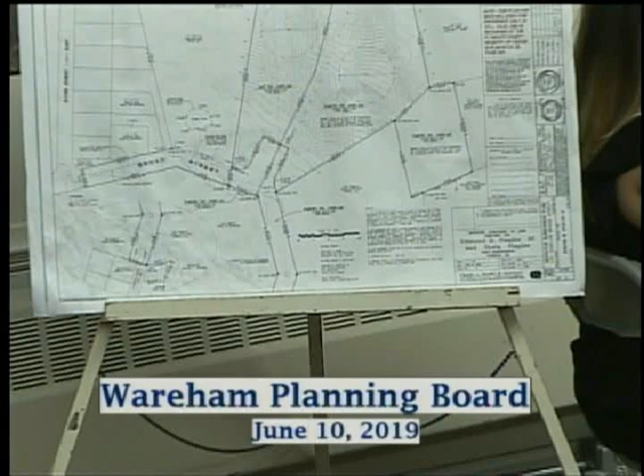The last time we met, there were 4 comments you wanted us to address, and GAF has addressed those and provided updated plans and a cover letter. The first comment was about the reference sheet, the existing subdivision, which was requested to remove Mr. Rowley's name, which they did. Then there was a question about easements, and they've clarified that all of the deeded properties have appropriate easement references within them.

Then there was a suggestion about moving the road as far away from the vernal pool as possible, and they've updated the plans with some annotation. Basically, our intention is to keep the road as far away from the vernal pool as possible. There'll be a trench for the sanitary and electric between the property line and the road. Our intention is to minimize that as much as possible, but keep the machinery and soil within the right-of-way. We'll field-layout that as best we can and keep it as far away from the vernal pool as possible. So that was the third comment.

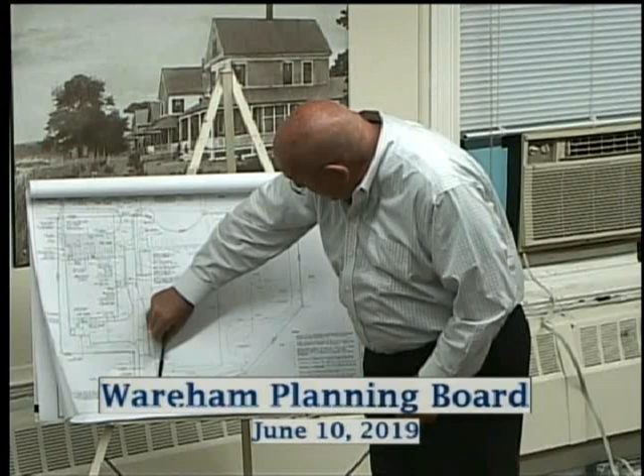I consulted with Factory 5 Racing, and when the abutting landowner acquired this parcel, apparently he stockpiled quite a bit of material there in the form of rocks and boulders, things of that nature. In discussions with Factory 5 staff, the elevation on this site was essentially the same elevation we have at the rear of Factory 5, at the rear of 1004D, and these piles are just rock, they are rock piles.

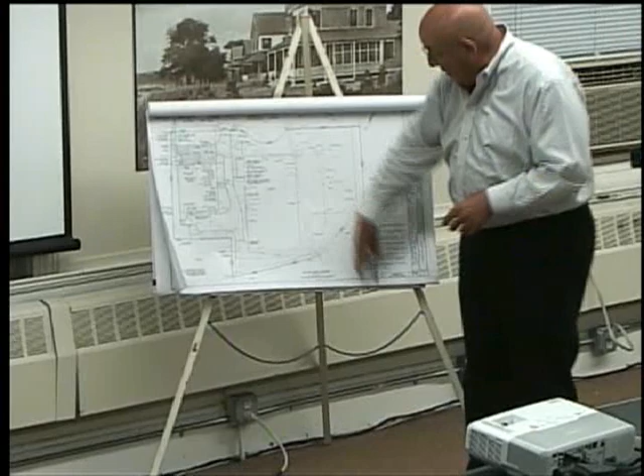The comment was made that we didn't have a lot of information on that, because we didn't dig through them. We did our test pits in various locations across the site. We've done work on this site, and back in the industrial park. It looks to me that the base grade at the rear of the site is around 51 or 52, thereabouts.

We think all those stones are piled on top of it. If you would be so inclined to approve the project and condition it, perhaps a condition could just be put on the project that we assess the ground surface on which those stockpiles had been placed for consistency with what we have throughout the site. But that's the information I was given relative to what took place there.

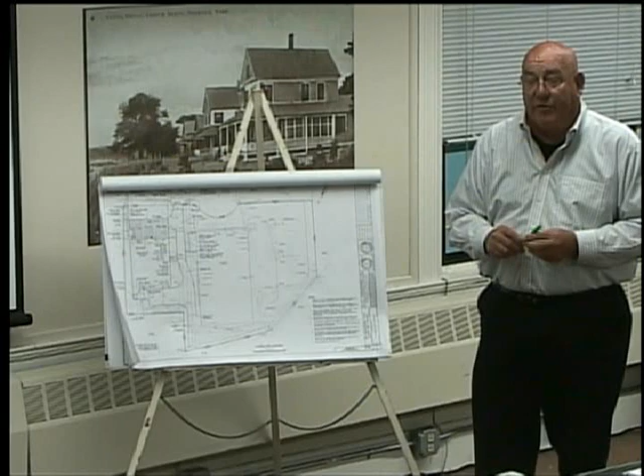Those piles essentially appeared overnight. It literally appeared overnight. So no one really knows too much about it other than one day they were there, one day they weren't there, the next day they were. If the person who put them there was so inclined to remove them overnight, I suppose so.

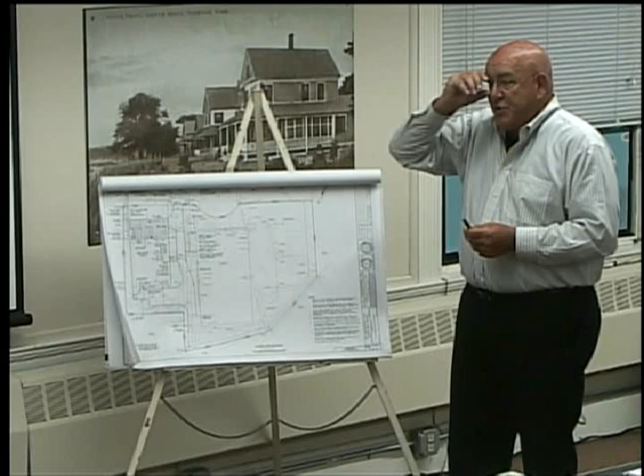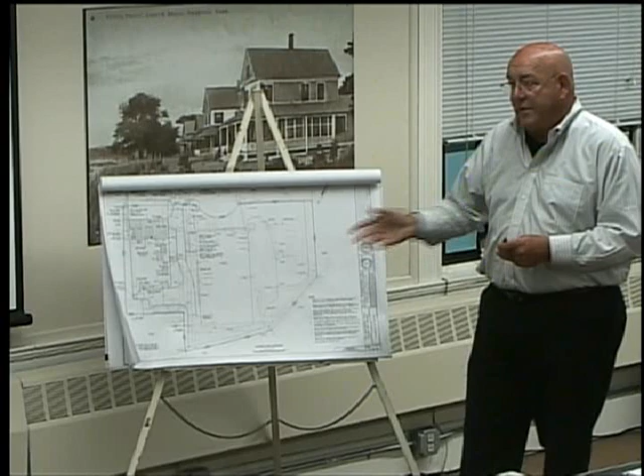But they'll need to be removed for the construction of the building. Allegedly, the person who stockpiled them had permission from the prior owner to use that area for a stockpile. The property's been conveyed over a year ago. He has no rights, he hasn't been granted permission to use that as a storage yard. They're working with them to have that material removed, and I think that's probably the best explanation I can give as to its current status relative to that material and as it relates to the comment.

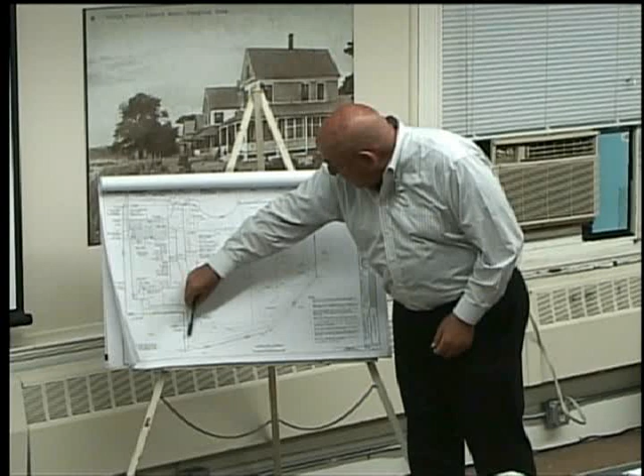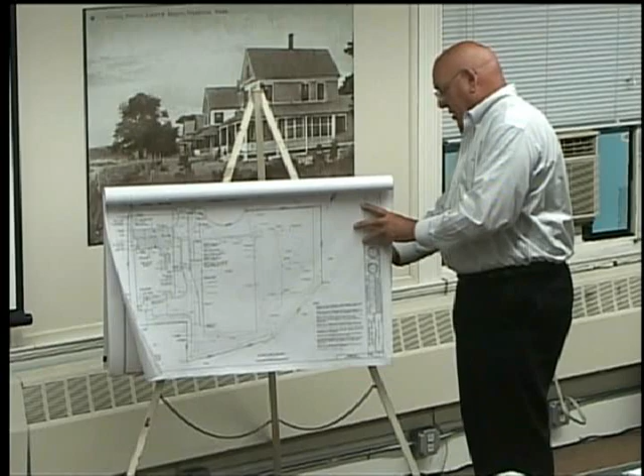Because we do have drainage proposed here, a drainage basin proposed in this small area. When we look at the spot grades and the topography around that 51, 52 number that shows up on sheet number 3, if you look at each spot grade, you'll see a 51.2, a 51.2, a 51.7, a 51, and 52 over these other areas. So it's lending the impression that was a relatively flat piece of ground that material was deposited on. That's how I conclude what I conclude from reading the topography and discussion with Factory 5.

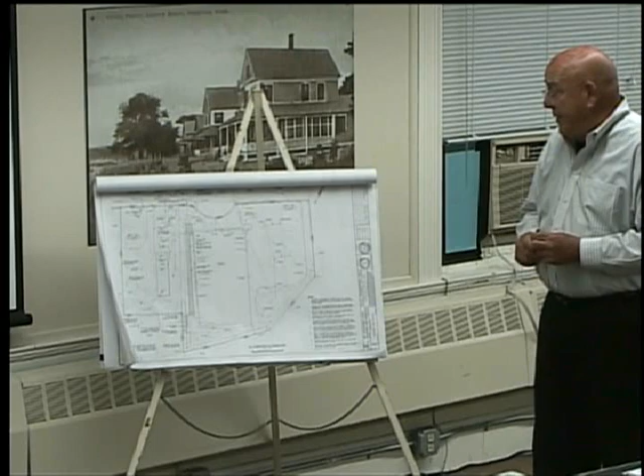That confirmed that condition. So that's the disposition of the rocks. They do need to be removed, and we can do whatever's necessary to ensure after the removal. We'd gladly go out and dig a test pit. We have one test pit right at the outside edge, running 10 feet to groundwater. We don't expect any issues. So that's what I have as far as that goes.

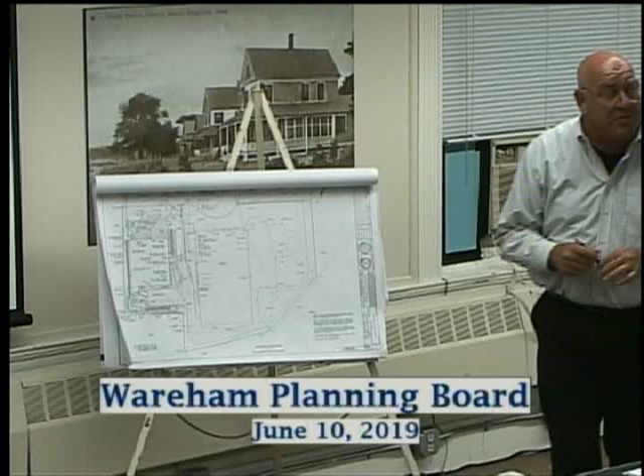As I recall, I think that was pretty much the two major outstanding issues. There could be more if there is, and I'm glad to address them.

How do we reconcile the facades with section 752.12 of the bylaw regarding windows?

Well, it is site plan review. I guess you could condition it in any way you'd like. We read that section of the bylaw as being pretty specific. It only allows 4 building materials. I think that it's kind of very restrictive in some respects, but that's not for me to say.

I think it'd be more important to have a building match the needs and desires of a longstanding business that's been in town, and I think the board has the authority to allow the building to be constructed as proposed. I think it just adds a little symmetry to the site, and it adds identity as well. It does look like the Factory 5 building, and that's what it's intended to be.

In fact, your existing building, in terms of the proportion of the windows, is more in keeping with the bylaw than these elevations are. If you look at the proportions of the windows on this facade versus this facade, they're different. The existing is more in keeping.

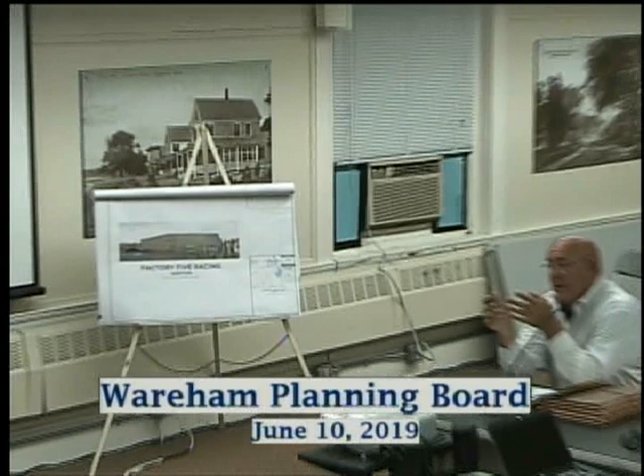Didn't you have a comment? Well, just to Ken's point, when he mentioned something about another building - at least in this instance, they already own a building in town, and it's been there for quite a period of time. The rationale to use the same type of construction and finishes that you have on that existing building, on one that you're proposing, seems to make some reasonable degree of sense. It's not a situation where it's just a building that one individual is putting up for their own benefit, adjacent to somebody else's building.

So there was a little bit of thought put into what the owner and operator of the business would like to see out there. Let's not lose sight of what it is at the beginning of Tow Road and what it is at the end of Tow Road. It's far from pristine in any respect. This building clearly is a huge improvement over the structure that currently exists at that location. It's just another improvement to Tow Road in that industrial park.

And granted, it doesn't really fit squarely within the box that's prescribed by zoning. There are a couple of caveats in the zoning bylaw that give everybody a little bit of latitude on it. But when we look at what the business has done in town over the years, what they continue to do, how they continue to grow, how they continue to stay in the town and improve the properties they own, I think that has to be given some degree of credit in this instance - particularly where they are matching up to what they have there, and it will give some true identity to Factory 5 Racing as someone drives down Tow Road and views that right-hand side at the end. So that's all I can really add as far as rationale on the architecture.

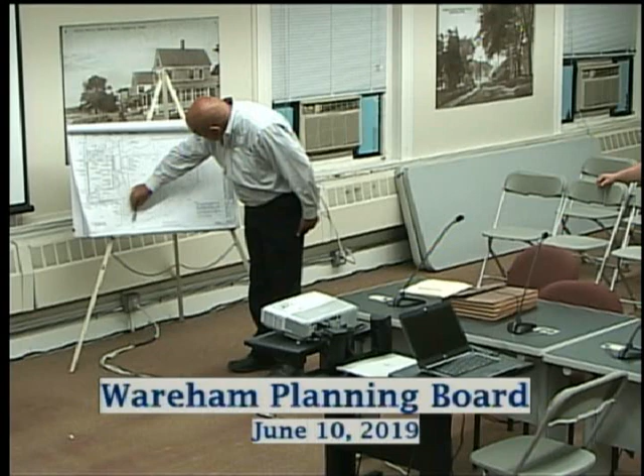Does that line flow to Tow Road or the other way? No, it goes down. It runs in this direction down to this sanitary manhole, comes back across here, goes through the industrial park, and then to 195.

Bill, just for reference, it would help if these long 120, 200-foot long facades were broken up. I find really no objection for me on those types of things, but pass that on to your clients so they can pass it on to their designers, so we're not faced with the pressure of his schedule and looking at huge pieces of metal that go on for, some of them are 200 feet long.

I believe they have an obligation to do something with it. Don't bring it to the board again with a gun to our head. I understand the gentleman's position, he's got a schedule to meet. So what are we doing here now, making him go back and redesign? It can be done in the beginning.

The engineers who bring the projects to us, you know this. Tell them - believe me, I'm the first person that speaks up about the bylaw and what's in the book and what people are supposed to do, and I do it on a fairly regular basis. But I can't convince people as long as this jerk is on the planning board, it ain't gonna pass.

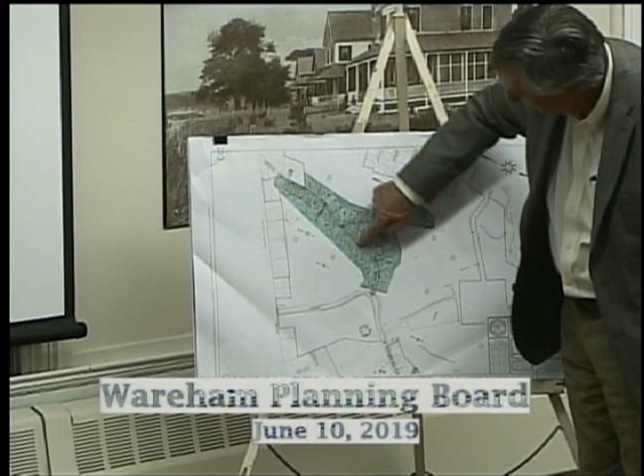So we're gonna swing our direction down. This entire area is wooded right now between the 11th hole, 13th hole, and 12th hole. This first setting will be this road with units on either side. That will be the next phase. In that time frame, we're going to relocate the 12th hole by creating a new par 3 off of the first hole.

We will get that work going so we can make that switch on a moment's notice. Then we'll complete the ring road in here and then get to the perimeter and out into the extension here. So there's really 3 different approaches for how we're going to attack the next 56 units reflected on this plan.

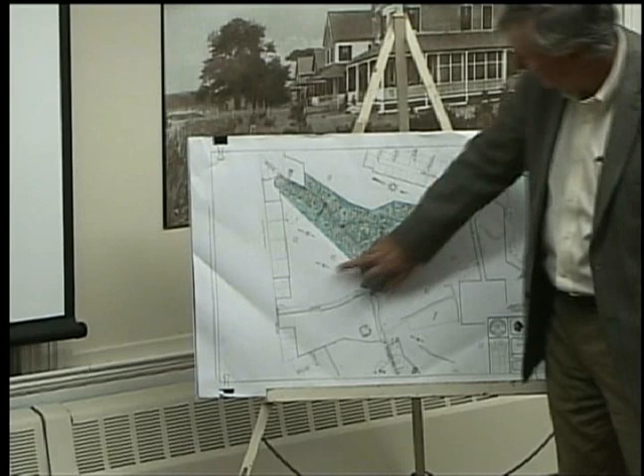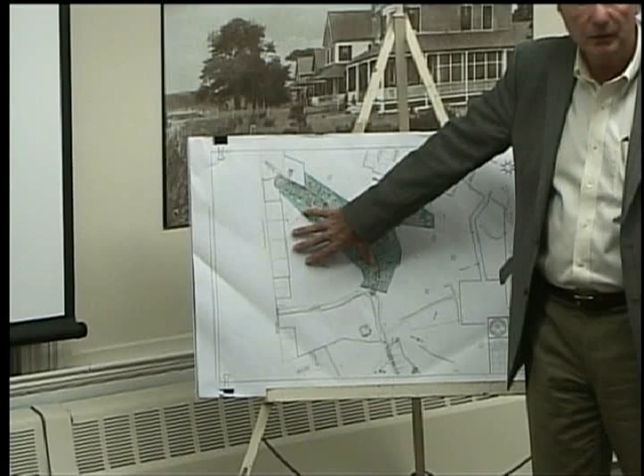Good, 16, go. I don't think it does. Not the current ones. No, right. I mean 12, that's not 12. No, it's not 12, no. That's the pavilion, so those do not designate that. I'm not sure what those numbers represent. Those were there, I believe, from day one, so that might have been the old numbers - the hole numbers. You can see the 16th green located in the elbow there, but this is not trying to put the golf course on this plan.

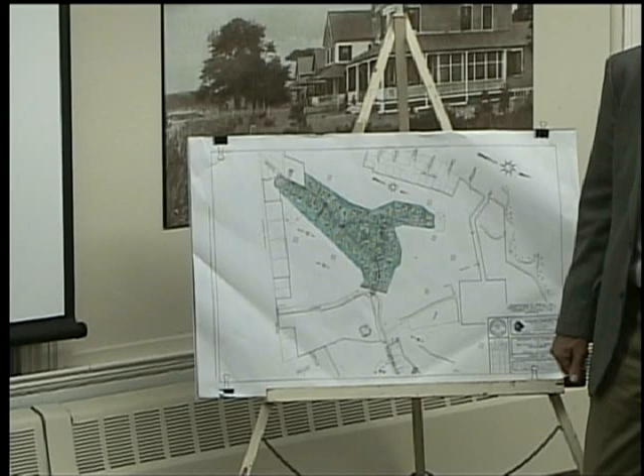So the golf course, with the exception of the 12th hole, which is being rebuilt in the plan previously shown - the numbers are changing, but the holes themselves are not changing. 16 is on the other side of the page. The relocating one is 15. 16 is over here, which is a par 3, you just can't see it on this sheet.

It's just cut off. This plan does not try to locate golf holes - it would be confusing to look at it that way. We still have a 16. We didn't want you to tee off in somebody's living room. So.

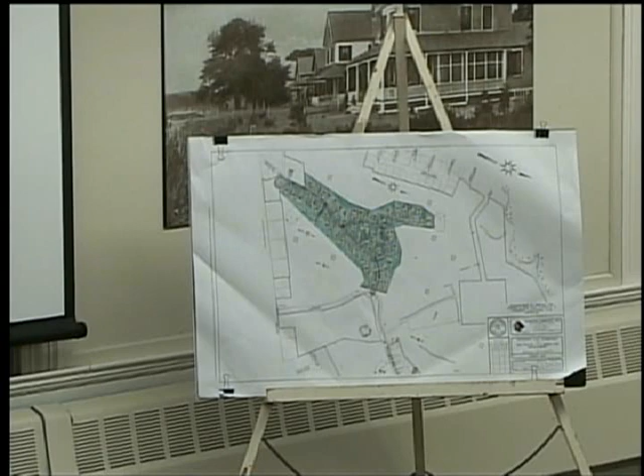Is there any other revisions to the course that would be required? Not necessary for this housing work. Okay, I was just looking at one of the conditions of your special permit that says the changes to the golf course will be completed before you begin phase 3. Before the beginning of phase 3, yeah.

It's not specific to a hole, it's whatever changes were to be made to the golf course - they had to be done and completed before phase 3 was started. Right, so.

Anything more as far as the definitive about Anchor Way? Is that - what do you mean, George? Do we need more - I know they're saying it's a driveway, but I think it's the same as what Jetty Lane is in phase 1. That has no layout either. But that portion of the development gets its frontage off of the lot that the larger Jetty Lane is within, and it's the same thing with this neck that goes off to the edge.